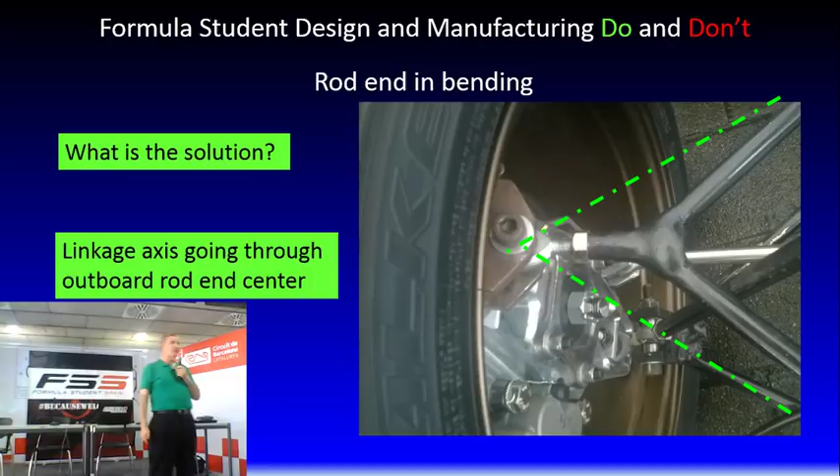So what's the solution? This is an example of a better car. Sorry, I think we went too quick. No, yeah, that would be the solution.

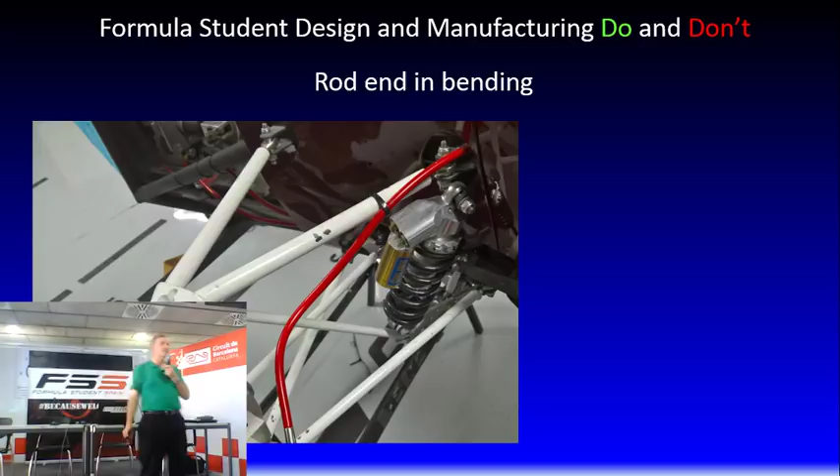Like this, this is another example. It's not as bad, but it's still bad. You have here the linkage of the pull rod, which is not going through the outboard spherical joint of the top wishbone. You see that? It's not bad, but I've seen obviously way worse than that. So you have to be very careful about that.

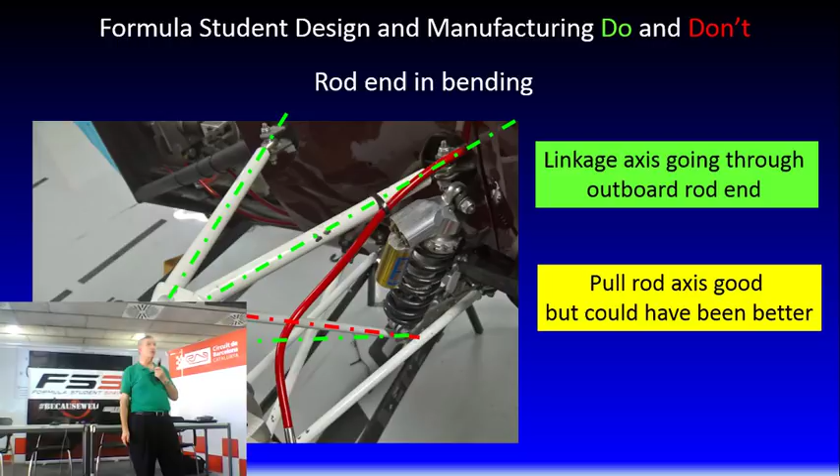Let me give you another example here. That would be a much better example.

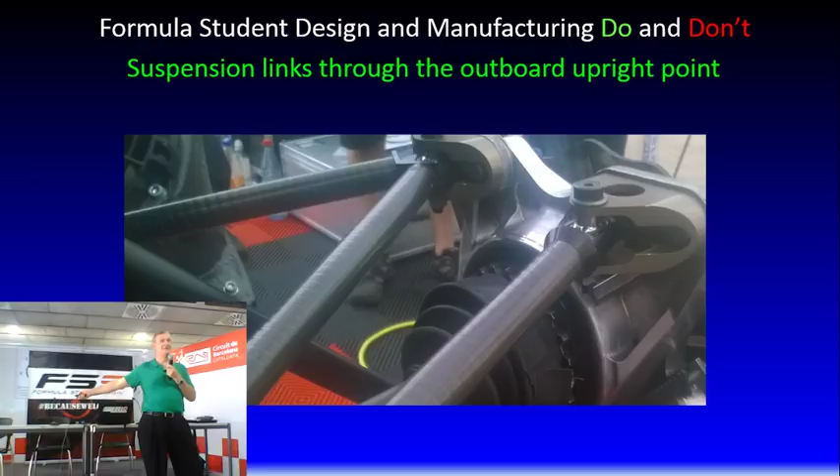You're up, and it's not because it's carbon fiber. I need to get used to this. Yeah, you are up now. Okay, it's going. Yeah, okay. So it's like a turbo lag on this thing, it takes a little bit of time to react. Presentation sometimes. It's like a lady, sometimes you touch the wrong button. Well, the girls are going to tell you the same thing about the guys, and they are probably right also.

You see, and it's not because that suspension is carbon fiber, yeah it's well executed and so on. It's probably expensive, but at least the linkage, the axis of the linkage of the top wishbone there, goes through the center of the rod end.

It's that simple. If you have a rocker, I'm going to do it with my hand. You have a rocker like this, and you have a push rod which is not in the plane of the rocker. You agree with me that not only are you going to have a rotation, but you're going to have a bending, correct? And usually the danger is that to cope with the bending, the guys build a rocker which is stiffer. And as we're going to see, stiffer means necessarily in that case heavier.

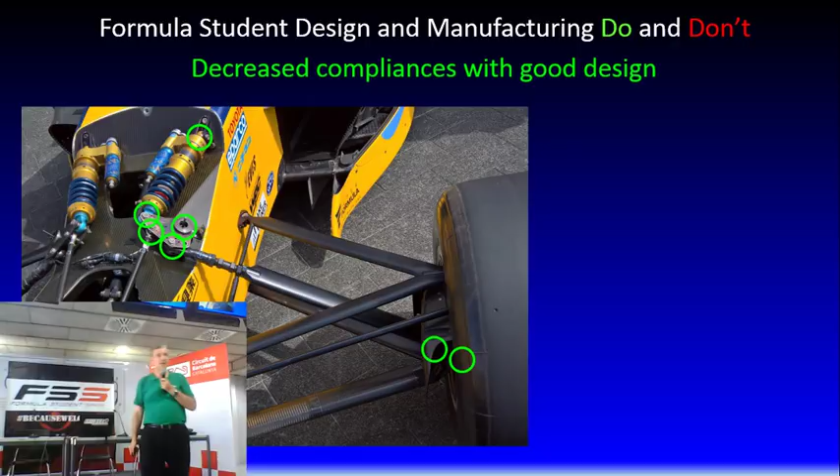What I'm trying to say is that when you have compliance, you can work on the consequence by making a part more rigid, which means thicker sheets of metal and so on, but the price you pay for that is weight. Or you can work on the cause and try to put the forces coming from the tire through the chassis at an angle which has less load, with the same grip on the tire, the same Fy, Fz, Mz, Fx on the tire, but less load on each pickup point of the chassis and in each suspension element. So we are doing that, you will reduce the compliance.

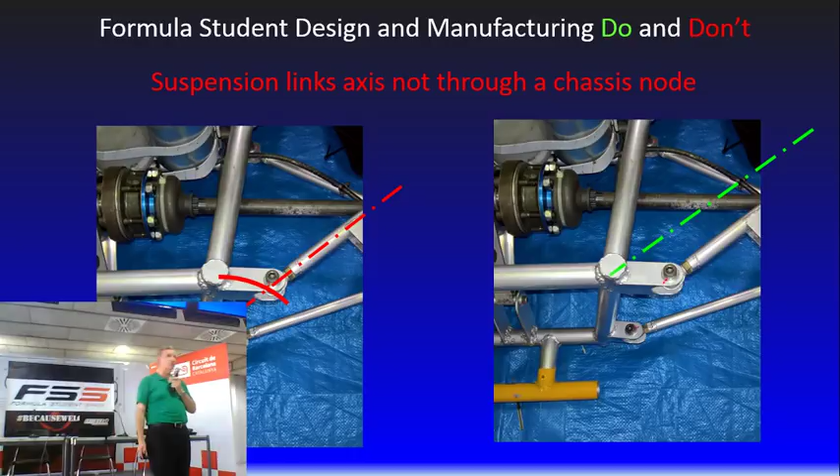Let me give you another example like this, which is also quite bad. If you look at this, the linkage in red is not going through the node of the chassis, and I don't understand why such a mistake has been done.

I need to make a comment here. I have a gentleman here who is a teacher in aerodynamics, and he will tell you the same thing for his business. Look, my company is selling software, so I believe in simulation. As much as this gentleman believes in CFD, I believe in vehicle dynamic simulation.

Yes, but there are some basic principles like this one which are, I don't know why, not taught anymore in engineering classes. You have to ask. A chief mechanic in racing one day said to me something I wish somebody would have told me 20 years earlier. He said, when you design a part, a wishbone, an upright, imagine that you are that part. You are a wishbone.

And you have to resist force. The force is coming this way. What is the angle with which you are going to resist that force? That's simple. Okay.

And I'm going to give you another practical example like that. So I wish that in green here, the linkage would have gone through the rod end center. By the way, I will make this presentation available in PDF for everybody, and you will be able to download it from Facebook. Okay, this one is simply criminal.

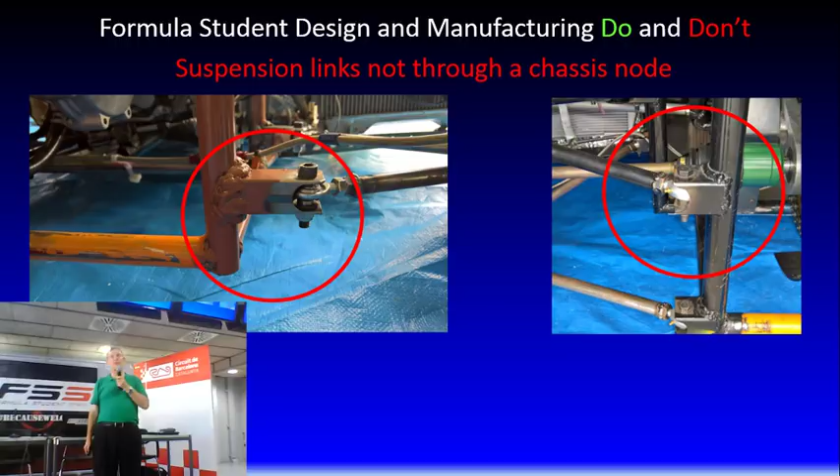The chassis should be one of them. The chassis is nothing else than the big bracket assembling everything—not only your suspension pickup points, but also attaching your pedal box, your seat belt anchorages, and all things like that. The chassis is one big bracket which is assembling everything. It should be one of the last things you should be designing. And then if you would have done that, you would have the pickup point arriving at the node of the chassis, because you would have put the node of the chassis where the pickup point of your kinematics was.

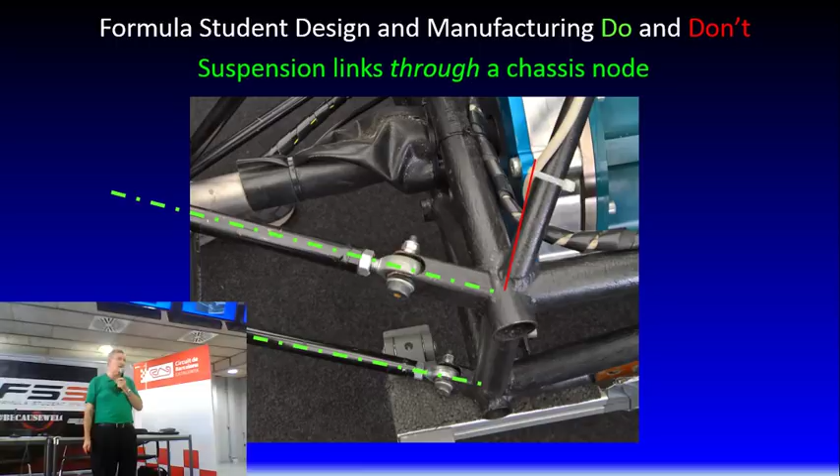So make a kinematic design, decide your camber variation that you want in rolling, heave, and so on, but make sure that the pickup point arrives at the node of the chassis. All right, that is not bad. At least the axis of the linkage of the suspension goes through the node of the chassis, but I'm not sure that distance was necessary. You see on the top there in red, that distance is going to make a possible flexion there. But okay, I will not be mad when I see that.

Okay, other unnecessary compliance. That's typical here. And I've seen that in this paddock very often.

Look, if I take this beam and it's supported here and there, do you agree that if I push on the middle, there is a chance I will be bending this beam? Yes or no? But if I push there, or if I push here, there will be less deflection. Yes or no? Why the hell is the push rod arriving in the middle of the wishbone?

And the guys have to tell me, but Claude, we calculated in FEA, and the deflection of the bottom wishbone is only 0.3 millimeter. Well, I have news for you. And before I continue the slide, I need to tell you a story.

I'm in Sebring with BMW Motorsport a few years ago. The mechanics are setting up the car, and I'm speaking with the chief engineer, and they were adjusting the rear toe. And I said to the technical director, how much do you need to change the rear toe for the driver to feel a difference? It's not a question of more understeer or less oversteer, it's not balanced for the driver to feel the difference.

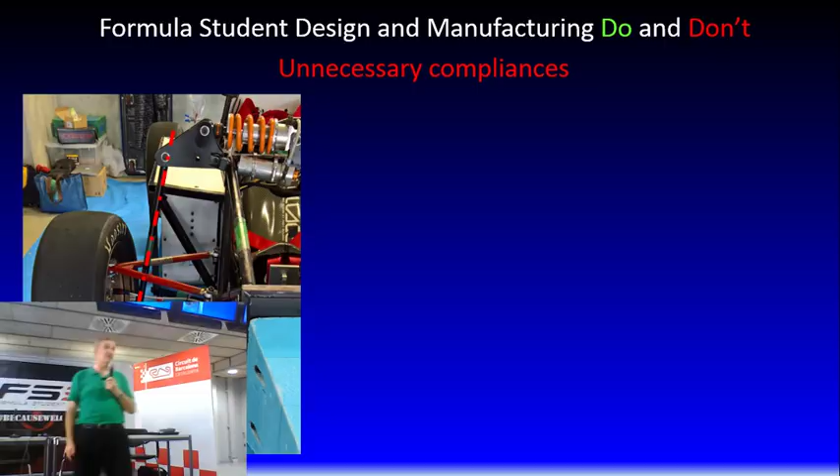So you realize, guys, that when your wishbone is bending like this, the calculation on motion ratio is not the one you think it is, correct? So what do you want? You want the push-rod axis going for the outboard point of the spherical outboard joint.

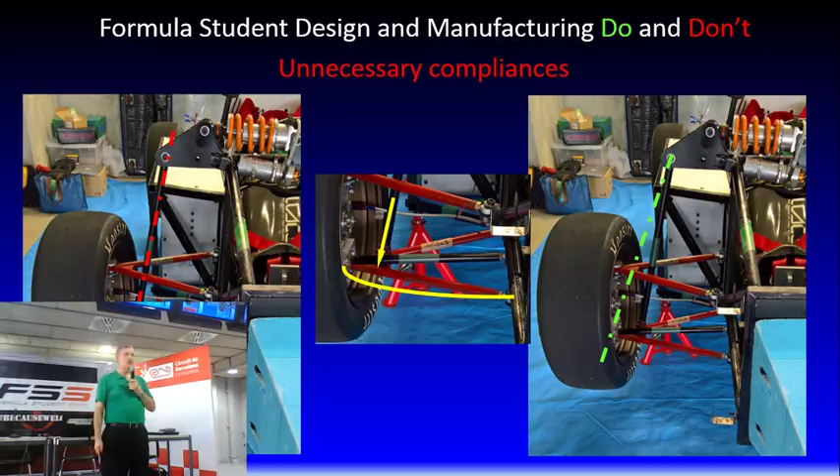Okay, I'm going to accelerate because there are a few of these mistakes I'm going to show you. This one is decent, not perfect, but close. You see the linkage of the push-rod going through the point of the outboard there. You have something similar this way. So that is decent - reduce the compliance and you will be able to reduce the weight.

Okay, all right, that is another crime. Single shear.

That's going to be bending. And guess what? It's on the toe ring. I guarantee that you're going to have tons of problems there.

What you want is double shear, like this one. This is good, though this is not a good upright in terms of the bearing, by the way, I don't like that. But this is single shear, you see that? You will admire this, it's a Formula Student car from about 12 years ago. You will admire the welding, pretty good, huh. Now, single shear.

Do you know what is the number one mistake that I see 95% of the time on a Formula Student car which has a rocker? All these rockers are single shear. I guarantee, the example I told you, put sandbags on the front or rear of the car with dummy wheels and dummy shocks and see how much your ride height is going down. 90% of the deflection is coming from the axles of the rocker, which are bending. By the way, if they are bending, you increase the friction in the rod end axis. So you really want to think about having a system which is double shear.

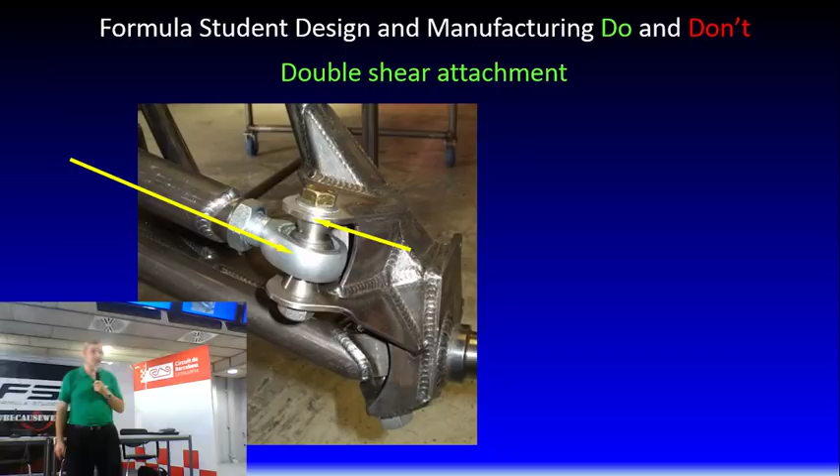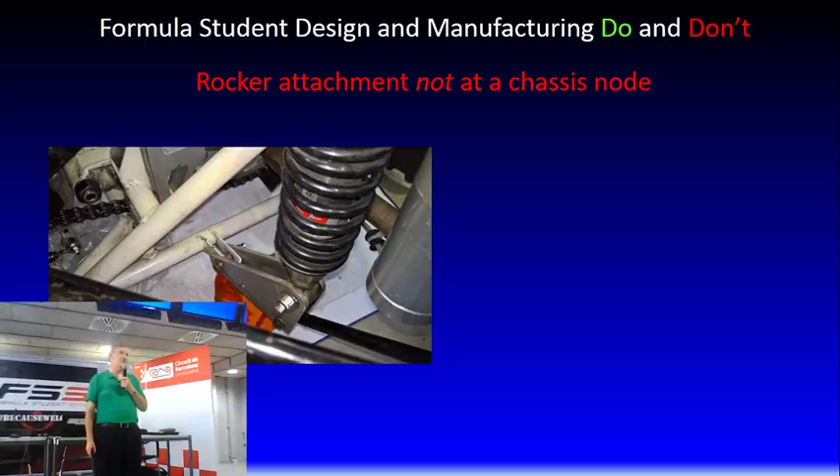Other things that I've seen. Yeah, that one is like this one. I'm starting to be really pissed. And that is okay, that has been done on an Indian car. Well, there are shitty cars here also.

You cannot have the pickup point, the rocker anchorage, in the middle of a tube. That tube is going to be flexing. You have a spring on a spring on a spring on a spring, and nobody's in control in that case. All right, no more comment. You cannot. The pickup point, the anchorage of a rocker, should be at a node of the chassis.

Okay, if you do a carbon tub chassis, then of course the recuperation of the forces should be there. Spring unit, same thing, this is another ridiculous thing. You have a damper spring unit which is on a bracket, a big bracket, and that bracket itself is in the middle of the tube.

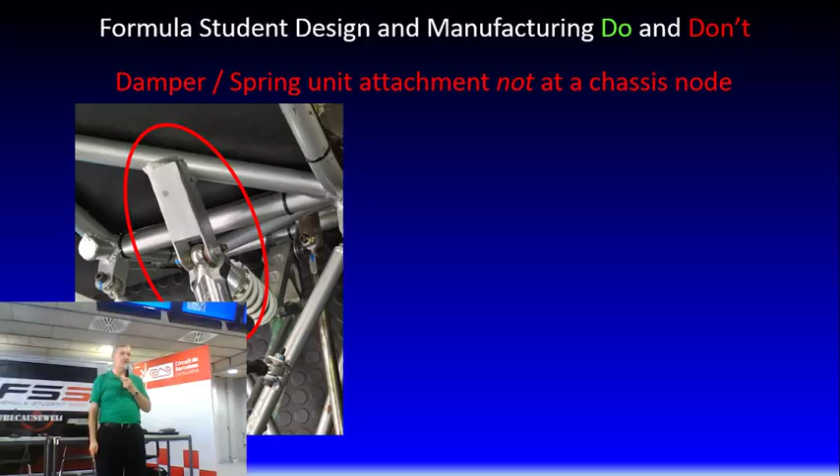I guarantee that the natural frequency, which depends on the motion ratio, is going to be wrong, because the motion ratio, with compliance or without, and don't forget you have to use the motion ratio squared. So when you make a 10% mistake on your motion ratio, that means you make a 21% mistake on your vertical stiffness on the chassis. So that's another thing here. That is also, sorry, I'm going too fast. This is something you want to avoid, a pickup point in the middle of the tube for the spring damper unit.

All right, the other thing is, this is a huge rocker. Are we in Formula Student or Formula Truck? Now, seriously, you would have reduced each size of that rocker by half. You would have had the same rocker ratio, correct? Guys, you need to think small.

You need to think lower CG. You need to think compact. You need to center the mass from front to rear, from left to right. You need to assemble the car towards the center of gravity, your inertia. There are three things which make a car very quick: low CG, lower mass, low inertia. Very clear. I don't have time to go through the calculation, but let me tell you this.

When you have 9 kilos of non-suspended mass, so upright with a light wheel and so on, that's already a very light non-suspended mass. These 9 kilos of non-suspended mass are 15 times more important in inertia than a 4-cylinder engine, because inertia is multiplied by the square of the radius of gyration. So you have to be careful with that.

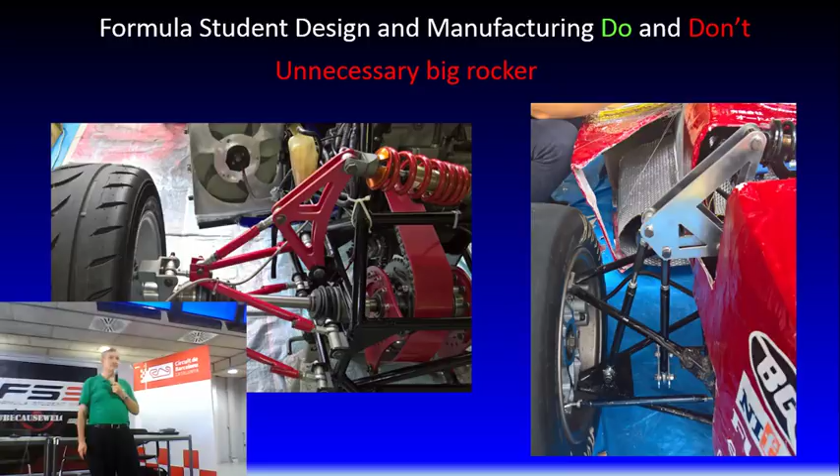That's another one, yeah, I went too quick for that. That's a huge rocker, it's absolutely not necessary. I'm going to accelerate. Yeah, these are rocker ratios, they have the same rocker ratio but they are much lighter. This is obviously something which is a little bit more sexy.

I mean, just, I don't know. I mean, yeah, you know, can I tell you a story here? You're going to look at me and say, why the hell does he use the word sexy in engineering? I'll tell you a funny story.

I built my upright, designed my upright for my Formula Ford car 40 years ago. Oh my boy, my guys, I was so proud, my upright was so beautiful. I went to see my machine construction teacher, and the guy looked at me and said, it's not sexy.

1979. Oh, by the way, the guy was a priest, a Jesuit. And he said, I don't understand why you use that word. He looked at me and said, have you seen the naked butt of a girl? I don't know where to put myself. I probably became red, because if I say no, I haven't seen anything about the word. If I say yes, I'm a big sinner. And he looked at me and said, I know you have seen one. I said yeah, okay. Isn't that beautiful? Yeah, okay, I want your pride to be like that.

I don't get it. He said, Claude, the best engineer in the world is God. Look at the FEA, the finite element analysis, of a neck. A neck has sustained 450 Newton vertical. Look at an FEA of a tree. It's perfect, it does exactly what it's supposed to do. And he said, everything which is pleasing to the eyes can be at the same time light and stiff. If you have a nice curve instead of a big angle, in FEA you're going to see less red color in that zone, correct? And you can make more stiffness with a thinner part using a large radius. That's where the word sexy is coming from, and in my opinion it's more sexy.

But, that's another one. An anti-roll bar, ladies and gentlemen, is supposed to work in twisting, not in bending. Do you see the huge distance between the leverage of the anti-roll bar and the support of the anti-roll bar, which itself is extremely frail? You agree that there is a problem there, correct? Huge distance there. Your anti-roll bar would be working in bending.

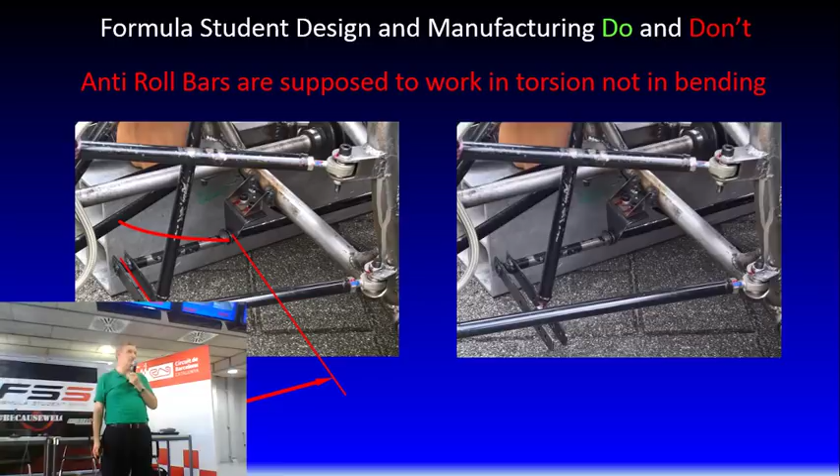Totally unacceptable. The other one here is a classical example. Not only on the bottom do you have a huge distance, as predicted, as we saw on the previous slide, between the support of the anti-roll bar on the chassis and the edge of the anti-roll bar. But also look at that, you have a single shear on the droop link of the rocker. Going back to see the droop link of the rocker there? Single shear. Remember I told you the droop link of the anti-roll bar should be in the plane of the rocker. And you say, oh, it's not so much. Mistakes will keep adding, and compliance is the enemy of driver control and confidence.

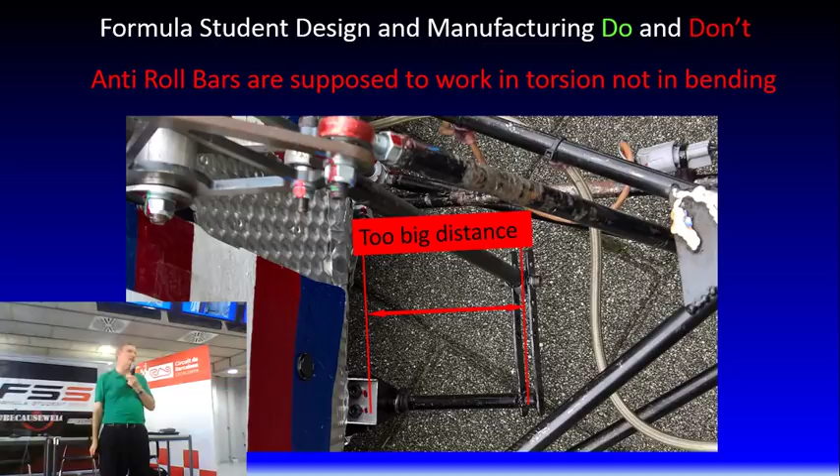A few other examples. Anti-roll bar compliance. Again, here in both cases you have single shear of the droop link. Try to avoid that. Very bad decision, very bad design. I saw many cars built like that. They said, oh yeah, but when we designed the car, we saw that the droop link was going to go through the push rod, so that's why we had to put a little offset there. You know what? That's because you start to build the car when the drawings were not finished.

I need to tell you a story here, 2011. I judged a team which was making their first car, University of Bologna. They won design, they finished second in the competition. There was only 17 cars in Formula Student that year, that was the first year. But they won design. And I went to speak to the team captain and I said, what's your secret? He said, we have a faculty advisor who is a pain in the ass.

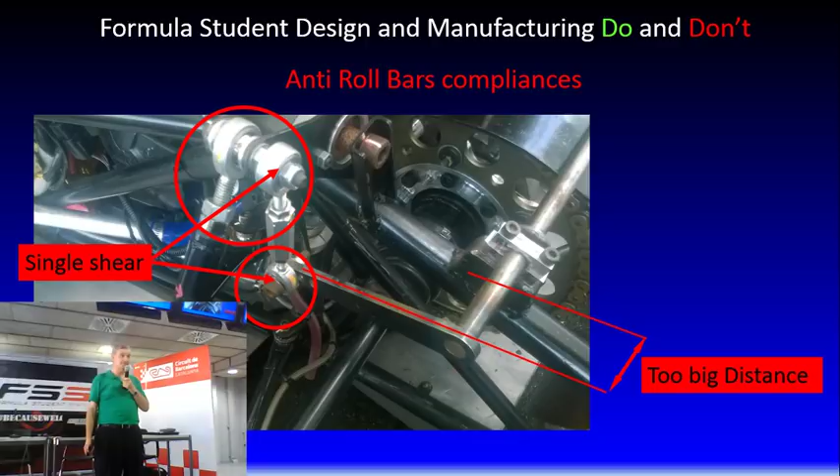Okay, all right. Another one. Big distance between the support. Another one: the pickup point of the bearing of the anti-roll bar should be at the node of the chassis. Otherwise, the stiffness of the anti-roll bar is not the one you're going to think it is. Okay, all right, I'm going to go here.

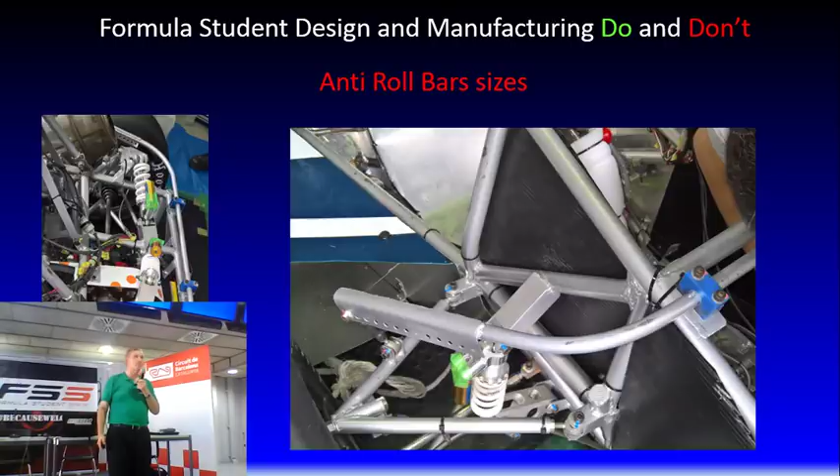Anti-roll bar is, yeah, this one is huge. And when I say huge, there are people who are making anti-roll bars, look at that, which are as big as this. I'm not kidding you. About 150 to 200 millimeters in length.

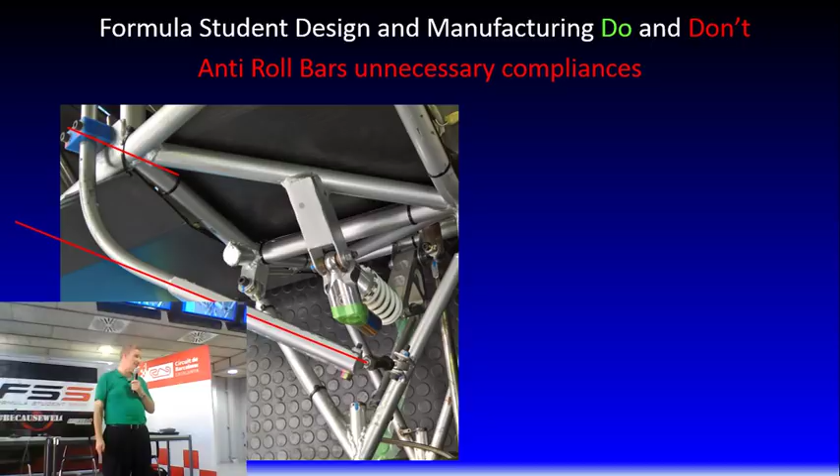And they have the same Newton per millimeter, Newton meter per degree at the wheel than this huge anti-roll bar. Think small, think compact, think minimum inertia in the YY, XX, and ZZ. Plus another crime, the pickup point of the drop link, which is happening in the middle of the wishbone there. It's going to bend the wishbone instead of bending the anti-roll bar totally.

Okay, you want another example of compliance? When I built my very first car, I ended up putting a dial gauge on the pickup point of the master cylinder on the chassis. When I was pushing on the brake pedal, the tube on which the master cylinder was attached was bending 2 millimeters. There was a part of my effort which was used to bend the tube instead of pushing the brake pad on the brake disc. Compliance. But then you have a lot of issue there of response.

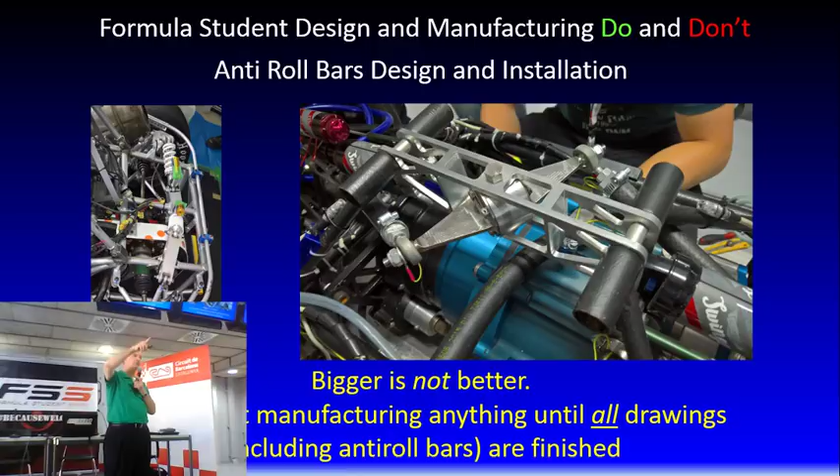We're on track, that's good. Anti-roll bar design installation, of course, huge thing. Oh, look at this one, for example. It's much smaller. You can probably have more Newton meter per degree with less compliance. That means better response and better control. The same number, if not more Newton meter per degree at the wheel with that small anti-roll bar. I don't say it's not because I showed that one better that that's what you have to do. There are even better anti-roll bars than this one. Think small, think compact, think light.

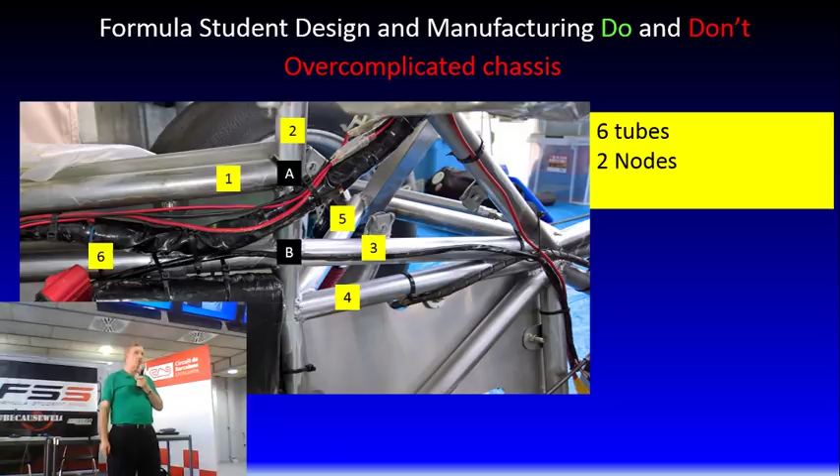So I'm going to tell you what's the secret if you want to make a tubular chassis. Minimum of nodes, minimum of tube, maximum triangulation, and a minimum of 3 tubes arriving at the node of the chassis. That's that simple. No, you have 2 nodes so close together and 6 tubes there. So the question is, try to make it minimum of nodes, minimum of tube, and maximum triangulation, and actually 3 tubes arrive at the same node at the minimum.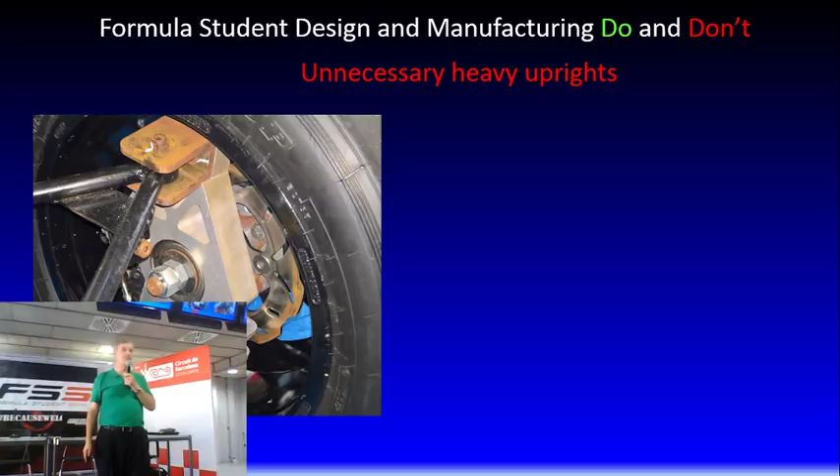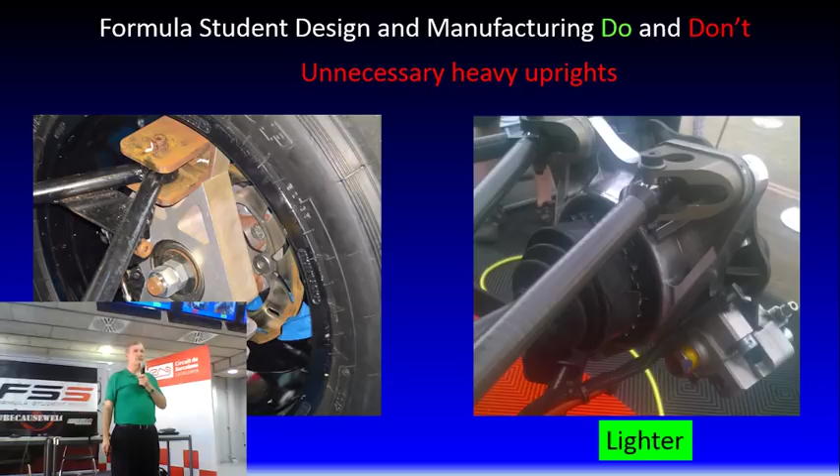That is, sorry, I'm too quick again. Let's see, it's a much better example. Okay, much lighter. Okay, let's go ahead. I took a tape meter on this thing. The push rod was 727 millimeters.

Do you agree with me that the longer it is, the more buckling you're going to have? So you're going to have compliance again. There is absolutely no need to do it.

Now I have a complaint. There is many suspension like that I see in the paddock with a push rod, a rocker on the top of the bodywork, and then the drop link going down and the anti-roll bar at the bottom, correct? When you make an omelette in the kitchen, it would not make sense to put the fridge with the eggs on the same floor as the bedroom, correct? You start to heat the oil, you need to rush upstairs to take the eggs, and then you come back and you crack your eggs in the fry, correct? Not very smart. Why in the hell do you take a force coming from the bottom of the wishbone of the tire, going up, then going back for the anti-roll bar there?

And guess what? On top of that, you have a drop link like this for the anti-roll bar and a push rod like this. All these things are going to be heavy and bendy. On top of that, I see these 2 rocker springs which are facing each other, and they're outside the bodywork. But the guys are making an aerodynamic car, and you realize that the springs which are on top of the cover there are destroying the efficiency of the rear wing. Well, if you make an aerodynamic car, make an aerodynamic car, alright? I don't say that you have to do push rod. By the way, a little comment.

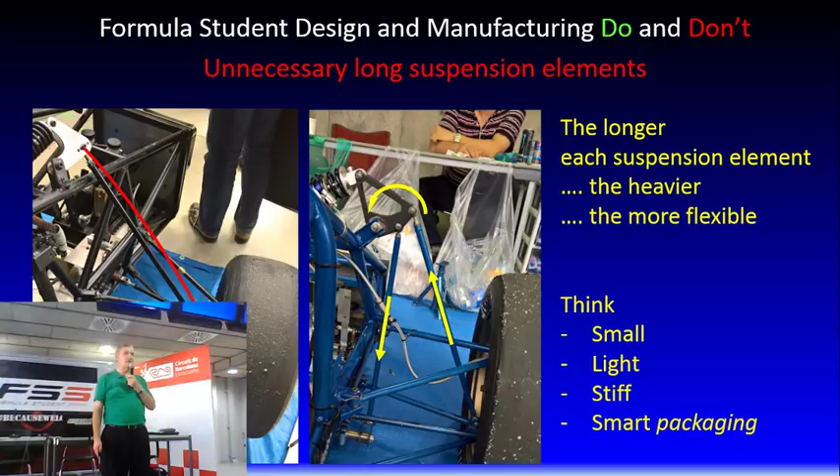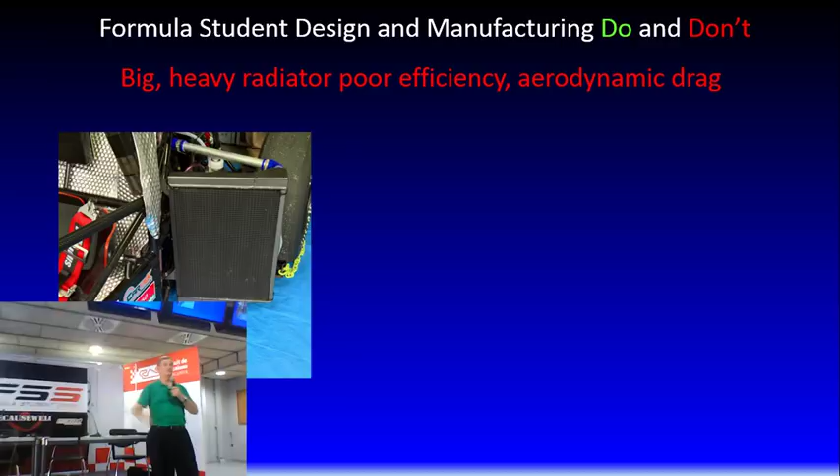All right, that's another one here, nothing to do with chassis, cooling. Look at the radiator. There is a team in Germany. They have 92 horsepower, and this is the size of their radiator. You agree with me that if you have a huge radiator like that, it's going to be heavy. And the reason why they need to have a big radiator is because there is no efficiency in this.

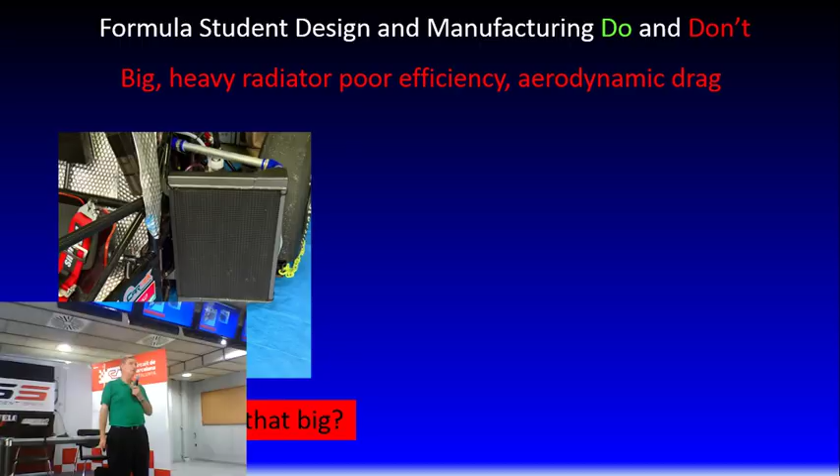Actually, that's interesting because I took a picture of another example here. You have the radiator there, and guess what? You have the air going in the side pod. And where do you think the air is going to go? The path of least resistance, correct? So when you have a radiator, oh no problem, we're going to make a bigger one. And you're going to pay for it with the weight.

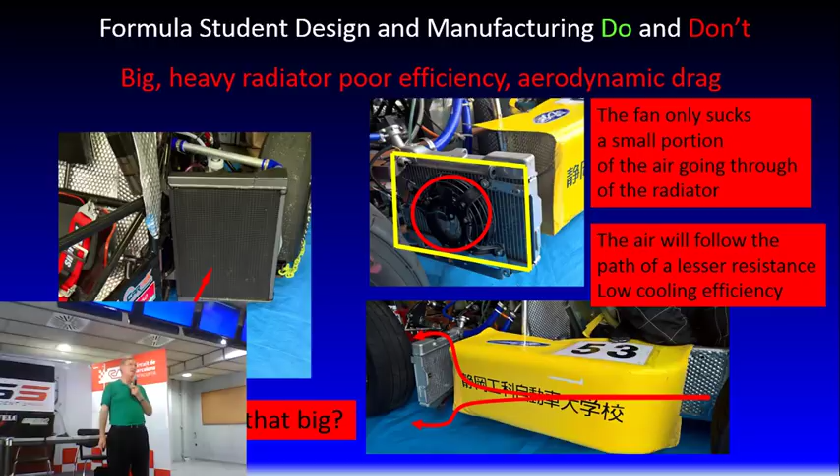Make sense? What about having, for example, here, that's a bigger one. And I took a picture not only of the radiator, but the side pod. There is not a nice venturi guiding the air through the radiator and exiting it. And by the way, a lot of kids are working on guiding the air to the radiator, and they don't care about extracting it. Extraction of the air of the radiator is at least as important as guiding the air in there.

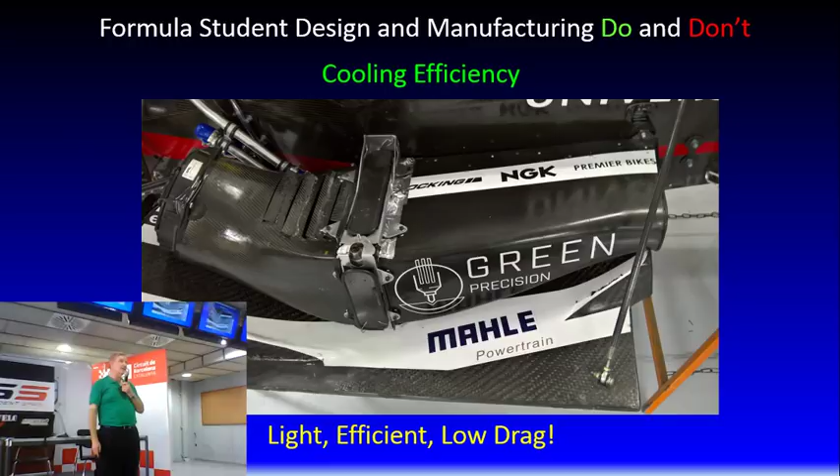Now let's give you a better example here. These people, from one year to another, they divided the weight of their radiator by 2.5 for exactly the same engine. Actually, they gained 3 or 4 horsepower from one year to another. But they divided by 2.5 the weight of their radiator, I think they said 2.6 kilos, and it cost them 350 grams to make this carbon fiber air conduction and air extraction with the fan at the end there. So think light, efficient, and so on. It's pretty clear. So conclusion: weight is your enemy. Compliance too. Avoid compliance. Make it simple, make it small, and make it light.

And form follows function. Darwin: you know, the fish wants to get out of the lake, and he's going to have legs. It's going to take 2 million years, but the form is adapting to the function, correct? Yes or no?

The worst thing that you can do for yourself when you design a car is to look at pictures of other cars on the internet. Define what function you want to achieve, and for that you need to make a brainstorm and a whiteboard. No cell phone, no internet. Define the function, and from there you will go through the form, not the other way around.

It could be that in your team you have a smart little guy who is like an Einstein guy who's going to have the light bulb solution. By looking at pictures of cars on the internet, your imagination goes from there to there. You are wiring up your brain with tons of solutions that are already existing. There is absolutely no need to copy another car.

Let me give you an example. You have Indian teams who are looking at German cars because the Germans cars are the best, so we need to copy the German car. Let me give you an example: I'm going to take two teams, Stuttgart and Munich. Usually they are decent teams. They have different cars. Why? Because cats are not making dogs and dogs are not making cats.

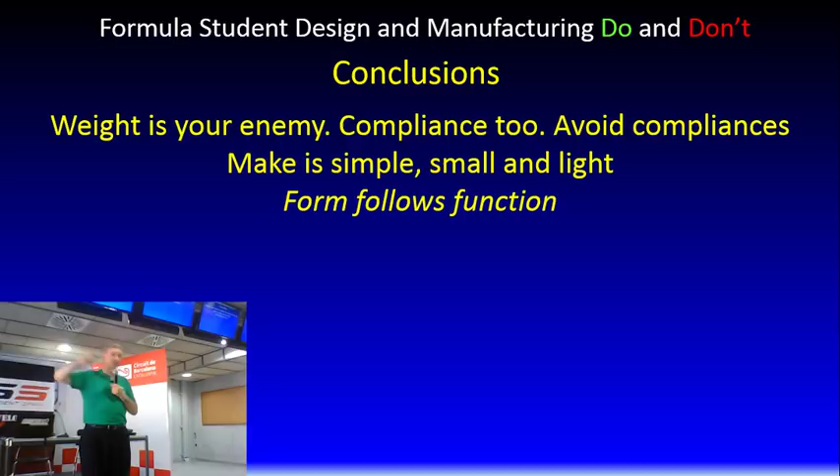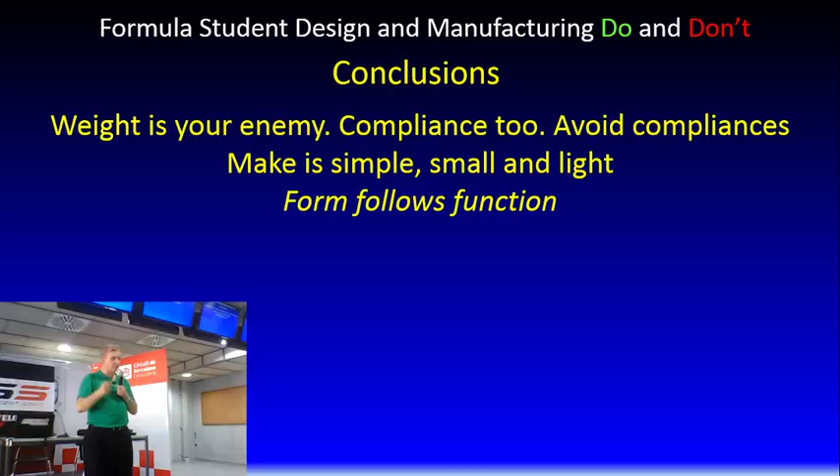So in that case, why would an Indian team with different—I don't say right or wrong—different budget, education, culture, access to software, manufacturing, and so on, want to copy a German car? It has to come from here, it has to come from the function. So write a list of the functions, then design the car, not the other way around.

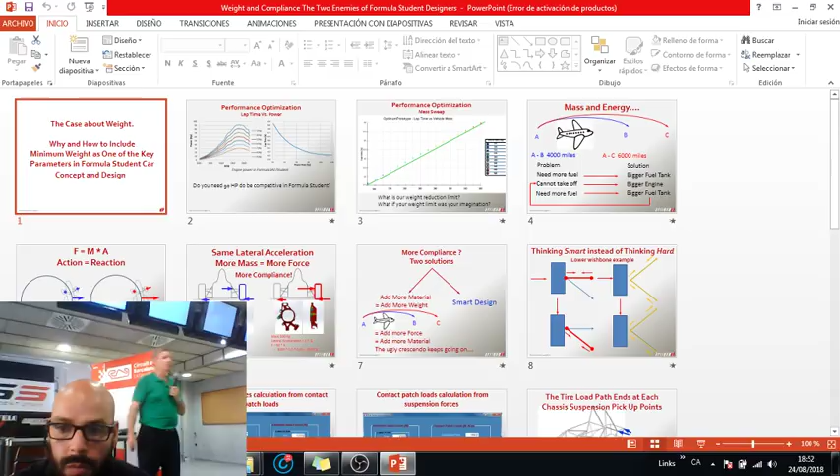So here you have lap time versus power. You have a power curve which you use in a single lap time simulation software. We put on the internet Optimum Lap, which is free of charge. It's not perfect, far from being perfect, but it's free. We did it to help students make a first selection based on the compromise between grip, downforce, drag, power, and weight.

The more power you have, the more your lap time goes down. But between 30 and 50 horsepower you gain big, and between 90 and 110 horsepower you don't gain much. Do you need 90 horsepower to win in Formula Student? You could, but you're going to pay the cost in fuel consumption.

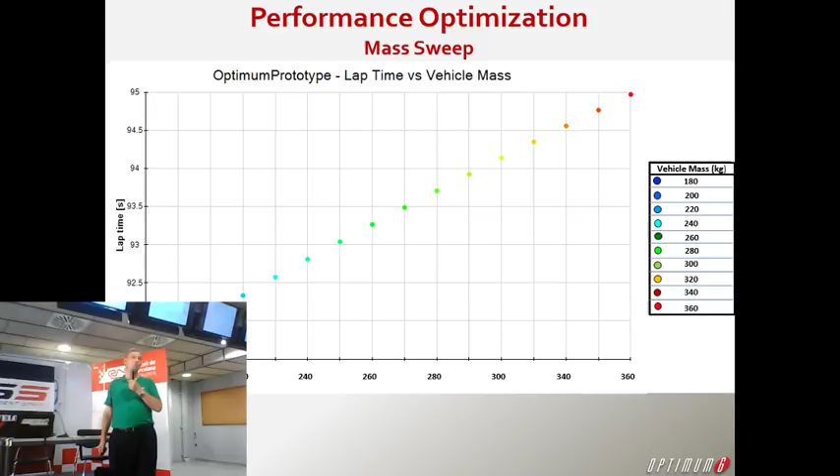F equals ma. If you have more mass, you need more power, but you pay more fuel. But if you plot mass versus lap time, it's incredible - it goes down.

I want to remind you that the coefficient of friction decreases with vertical load. So on a car of 300 kilo with driver, you could have a coefficient of friction of 1.4, and a 200 kilo car will have a coefficient of friction of 1.55. The lighter the car, the more return on investment, the more lateral force you're going to get.

So weight is an issue, and you maybe want to work on it. Let me tell you a story.

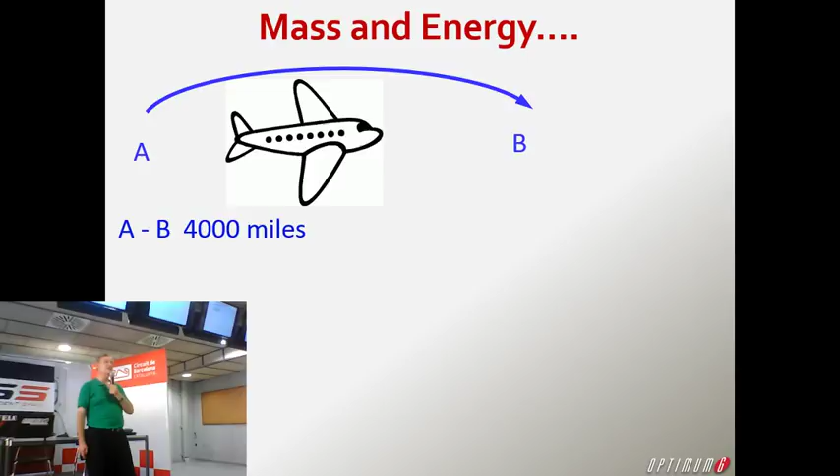You have an airplane flying 4,000 miles. You ask, are we in vehicle dynamics or flight sim? You'll see. You say to the pilot, I want you to do 6,000 miles, 50% more. You know what the pilot tells you? I can only do that if you give me more fuel, a bigger fuel tank, more kerosene.

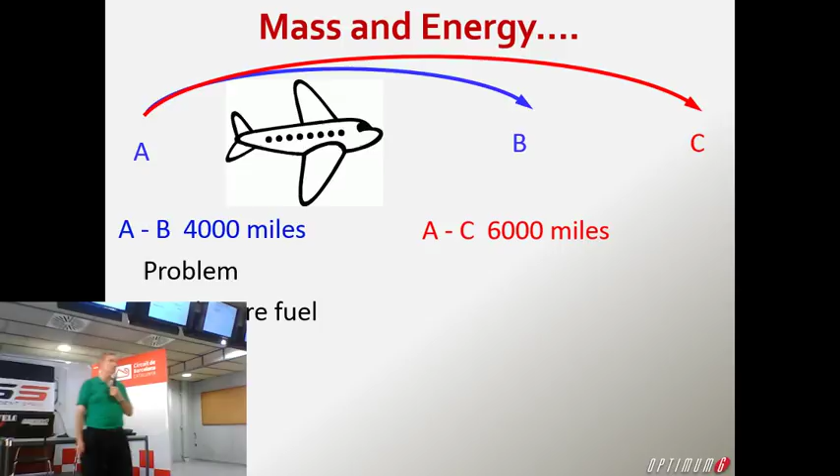So here's the bigger fuel tank. Then the pilot looks at you and says, the problem is the airplane is heavier and I cannot take off. So what do you want? I need a bigger engine. Here's the bigger engine. And the guy looks at you again and says, but a bigger engine sucks more fuel, so I need more fuel - and at a certain point the question becomes endless.

Now you look at me and say, what's that got to do with vehicle dynamics? Okay - Newton's second and third law.

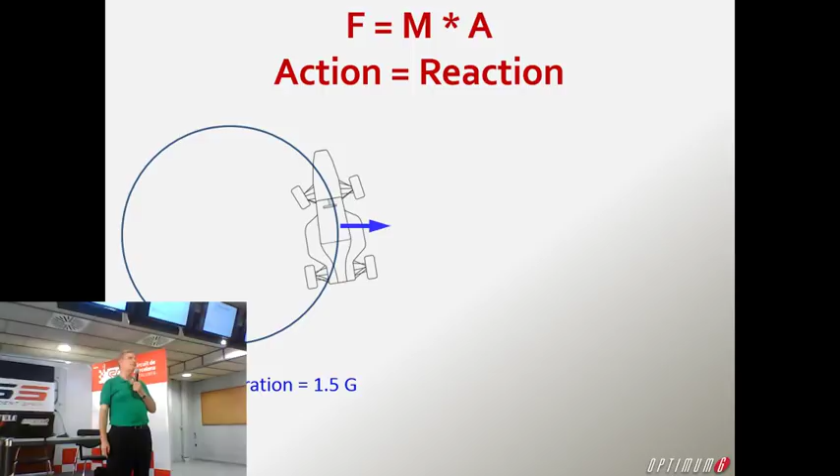We are going to look at a car on a skid pad. First example: F equals ma. The car is 200 kilo, and you take 1.5 G on a skid pad. You agree that you have a force of 3,000 Newton pushing the car towards the outside - 200 times 1.5 times 9.81, roughly 10, that's 3,000 Newton, correct?

Now you have a car which is 50% heavier - remember 50% more for the distance, 6,000 miles instead of - here 300 kilo, and still 1.5 G. So you agree, guys, that the lap time is the same. They are both cars doing 1.5 G. Yes or no? You agree with me?

All right, but you agree that now the sum of the force on all four tires will be 4,500 Newton. If F equals ma, with the same A and 50% more mass, you're going to have 50% more force.

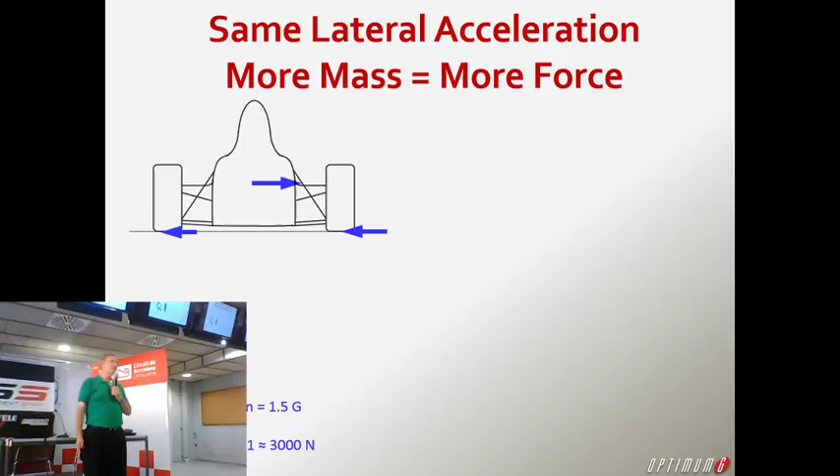So now let's look at the car viewed from the rear, and let's look only at the right rear corner - I'll zoom in on what's happening there, comparing the light car and the heavy car. Do you agree that I'm going to see more red color on the heavier car if I have the same upright? So do you agree that with the heavier car, with the same upright, I'm going to have more risk of failure, or if there's no risk of failure, more compliance?

Yes or no? Okay, a word about compliance. Between the steering wheel and the two front contact patches, I counted them—you have 24 springs. Worse than that, you have 24 dampers, and these dampers are in hysteresis. So you turn the steering wheel, and it's going to take a lot of time for the tire to start to twist and take a slip angle and generate lateral force.

Imagine a jet fighter. The guy has the stick between his legs, and he moves it like this. But because there is so much flexion everywhere, the aileron on the back takes a lot of time to respond. Do you think that guy is going to win a fight against another jet? Okay, you turn the steering wheel and it takes a long time for the slip angle to build. Do you think the driver has confidence?

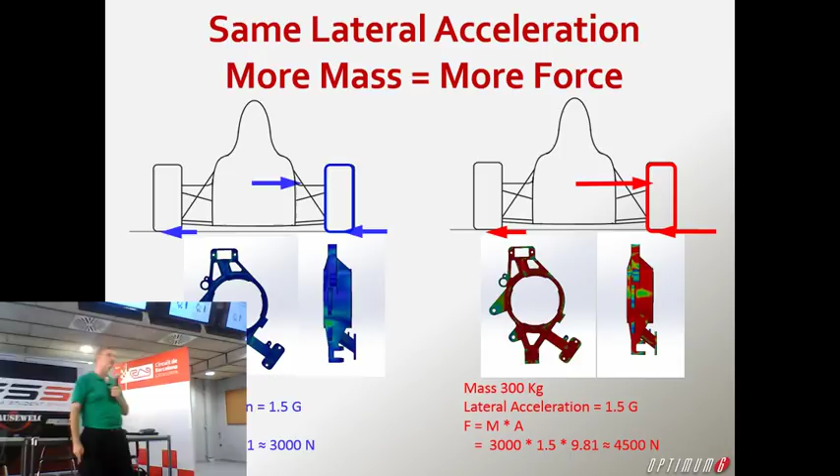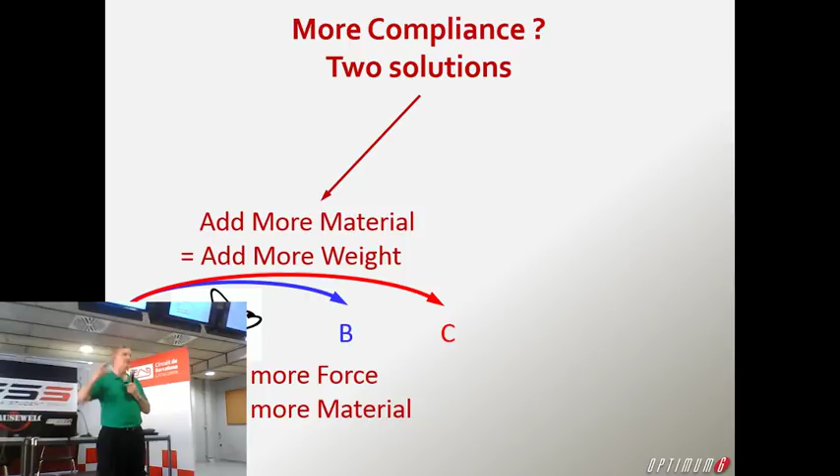So you have two solutions. Either you add more weight to go back to the same compliance, but then we go back to the crescendo of the disaster—more weight equals more deformation, and more weight equals needing more force, and so on and so on. Or you're smart, and you take into account—instead of working hard, I will ask you to work smart.

Let me give you a very simple example here. You're going to have a force on a tire, viewed from the top. You agree with me that you have some force on the tire. You're only going to have the top linkage resisting the lateral force. Yes or no? Yes? Okay.

Now, if you have braking, you agree that most of the force in braking will go in the rear link of the bottom wishbone leg. Yes or no? Okay. Now, if you have a wishbone designed like this, let's say 45 degrees, do you agree that the force you have in the wishbone is going to be—what? Zero, about 70% of the previous one? Why 70%? Because cosine of 45 degrees is 0.7, correct?

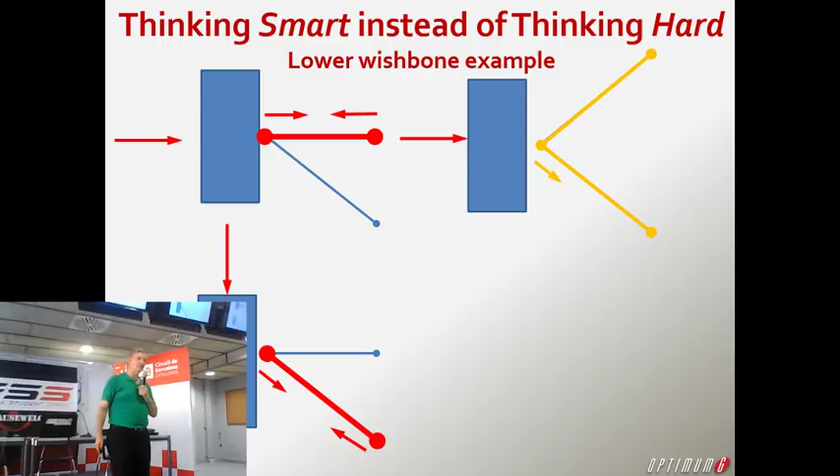So do you agree that for the same force at the chassis, you're going to have less load on the wishbone, correct? Then your rod end can be 6 instead of 8 millimeter, yes or no? Then your tube can be lighter. Then the chassis guy will be very interested to know that the XYZ force at the pickup on the chassis will be less, yes or no? So you don't need, for the same amount of Newton meter per degree of your chassis—you agree that with less force at the pickup point, you can have less weight in your chassis.

Think smart, okay? Now let me give you an example here. This is a question that I ask sometimes, and here the same thing: you're going to have one link in compression, another one. Look, I'm going to take this object. I'm going to throw it in the air.

You agree that this object has 6 degrees of freedom—forward, backward, left, right, and then free rotation, correct? That's the reason—because you don't want the wheel to go more quickly to the left or to the front of the car. That's why you have 6 degrees of freedom which are locked: 2 linkages for the top wishbone, 2 linkages for the bottom wishbone, 1 toe link and 1 push rod. You are at 6, correct? Okay, you want some degree of freedom control for steering and some for letting the wheel go up and down. That's why you have the spring in tandem.

Fine. So 6 multiplied by 4, because you have 4 tires, you agree that you have 24 wishbone linkages in the suspension. I'm going to ask during design final, if I see you next year—you take design final, you take a corner to the left, you have 1.5 G. Can you tell me which one of the 24 linkages has the highest load? And if you cannot give me an answer right there, you are dead meat with me.

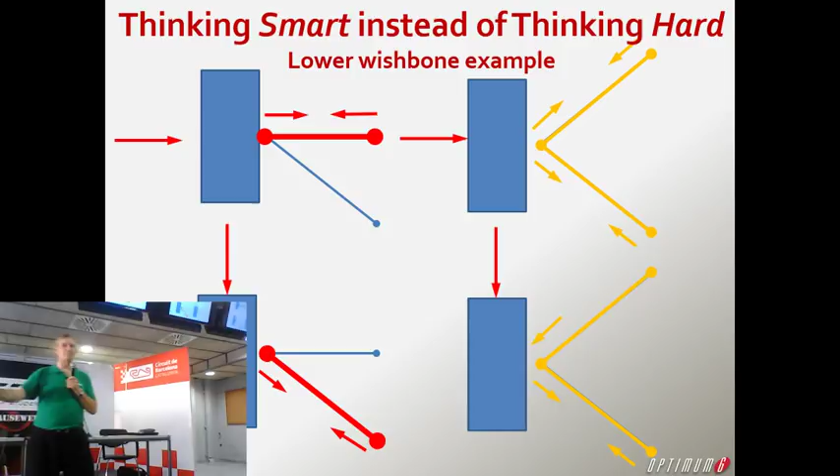All right, you can make this calculation. There are teams that are not bullshitting me, because not only is the software open, but they have binders printed with all the load cases. These people have done their homework, and they know the size of the tube, the rod end they need, and the force that applies at the chassis, because they've calculated the load case.

Yes or no? But I want to insist, there are two ways to look at that. One is: this is the force when braking, accelerating, or accelerating and cornering, and so much downforce - this is the force on the tire, force at that moment, that's the force in my imposed kinematics. Then you decide your tube and chassis dimension with that. There's another way to look at it: I know the force, now I change the shape of my wishbone to diminish the force, as I showed you here. Make sense? That's what we call going back to the sexy stuff. You're going to be able to do something which is both light and stiff.

What you need to do is something like that: you impose your XYZ pickup points in a simple software like this, you impose the forces that you have at each point. It doesn't need to be perfect to be useful, guys. You have the TTC, you have your tire models, you roughly know the FX, the FY, the FZ when you brake, accelerate, when you corner, or a combination of that. And then you can recalculate the force that you have in each element of the chassis, and the guy who designed the chassis would be very happy to see that.

All right, now another one here. Yeah, that's what I'm saying - the guy who designed the chassis would be so happy to have the force at each node of the chassis. So everybody's going to be a winner when you do the suspension load.

Stop here, I need to tell you a story. There's a very good judge, Steve help me, in England - he was there this year. He's building race cars for hill climb. I forgot his name, he's a manufacturer of parts for Williams and Red Bull and so on - David Gould, G-O-U-L-D. He has a website.

He judged a team and said, show me your load case. The people showed everything, and he said, okay, if you're that smart, let me give you a load case here: the car goes backward because you are spinning the car, now you jump on the brake pedal - what is the load case? He didn't have it. You know why he asked that? Because he had a customer for whom he manufactured a hill climb car. The car went backward, the driver jumped on the brake pedal because he didn't want to smash the rear wing on the wall. You know what? The two lower wishbones broke.

1986, long time ago, like an old puppy now - Indianapolis 500, March, turn 1. I saw the video: at the entry of turn 1, the rear wing is saying ciao baby. And if you want a show, tie the seatbelt because you're going to have one. And sure enough, the car pulverized, $500,000 down, and the driver woke up in the helicopter. Thank God he was fine.

They remanufactured the bracket - the bracket of the rear wing on the gearbox was what broke, you could see it on the video. They remanufactured the rear wing. Make sense? Two days later, turn 1, Indianapolis, the rear wing says ciao baby again, and the second car is pulverized. Do you know why? Because the engineers calculated the bracket of the wing versus the downforce and drag on the wing, but they never calculated the force when the mechanics were pushing the car forward - which is a ridiculous force compared to the drag and downforce of the wing.

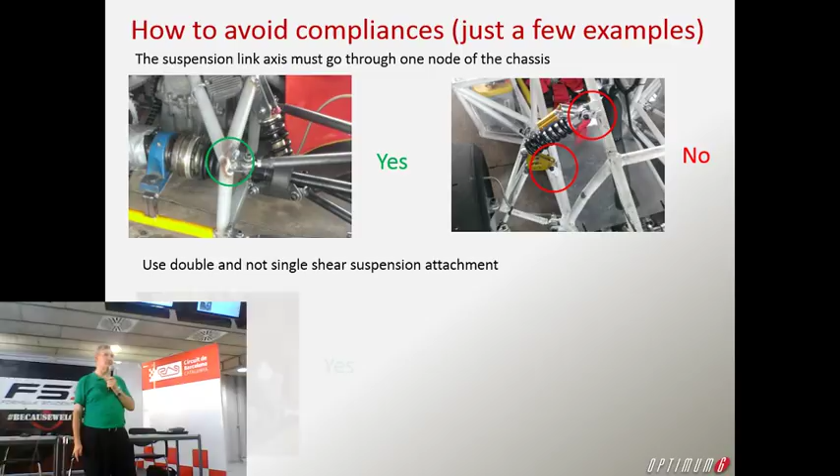So I invite you to make your compliance, your load there. That's an example, I'm going to go quickly. You cannot have the pickup point of a rocker in the middle of a tube - that is forbidden. Double shear instead of single shear.

Let me tell you about Formula Student Electric 2011. I was judging a Dutch team and a German team. The Dutch team was 82 kilowatt, four-wheel drive, tubular chassis, and no wing. The German team was also 82 kilowatt, four-wheel drive, no wings, but 230 kilo.

Now if you compare a monocylinder, carbon tub, 10-inch, no wing, with a tubular chassis, wing, 4-cylinder, 13-inch, yes, those things are not comparable. But here they are comparable, yes or no?

So I went to see the German team and said, guys, can you explain to me why for the same bloody concept you have more than 50% of the weight? They looked at me and said, but Claude, we saved 35 kilo compared to last year. I said, you don't answer my question.

My question is not how much did you save compared to last year - my question is why, despite you saving 35 kilo, are you still more than 50% heavier for the same bloody concept? And we engaged in a conversation.

At a certain point the German team said to me, but Claude, if we put the battery of the Dutch team in our car, we don't finish the endurance. Why don't you finish the endurance? Because our car is heavier. And so the cause is now becoming the consequence.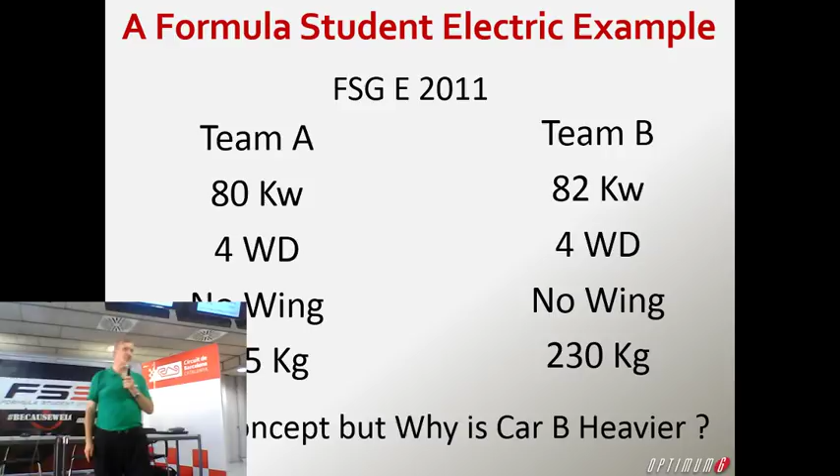Look at the suspension. On the German car at 230 kilo, every single rod end was 8 millimeter, all of them. On the Dutch car, on the bottom wishbone you had outboard 6 and inboard 5, on the top wishbone outboard 5 and 4, and the toe link was 3 millimeter - looked like a little sewing machine part.

Why? Because for the same lateral acceleration, if they have less mass, they have less force. For the same acceptable risk of failure or level of compliance, they don't need a big rod end, they don't need a bigger tube. Does that make sense?

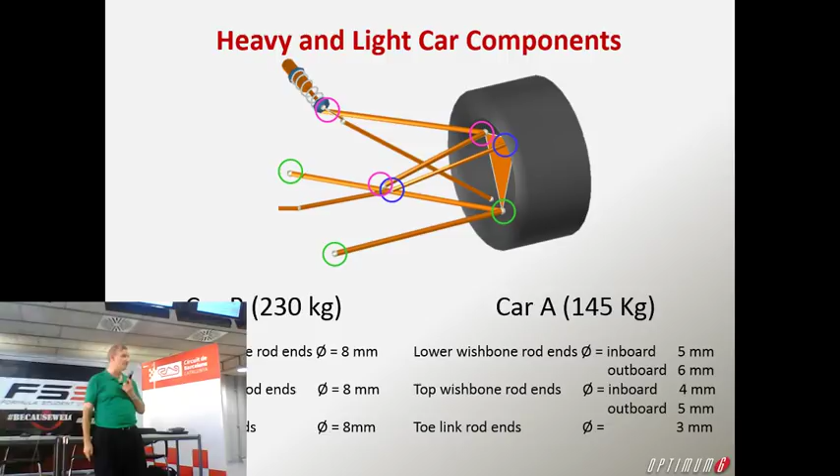So I'm going to tell you this: the lighter the car is, the lighter the car can be. The heavier the car is, the heavier the car can be. Let me tell you, and we're going to finish soon.

Let me tell you the number one thing I will do with your car - some of you have seen me judging. I will go on my knees, grab the front tire on the inside and the rear tire on the outside, or vice versa.

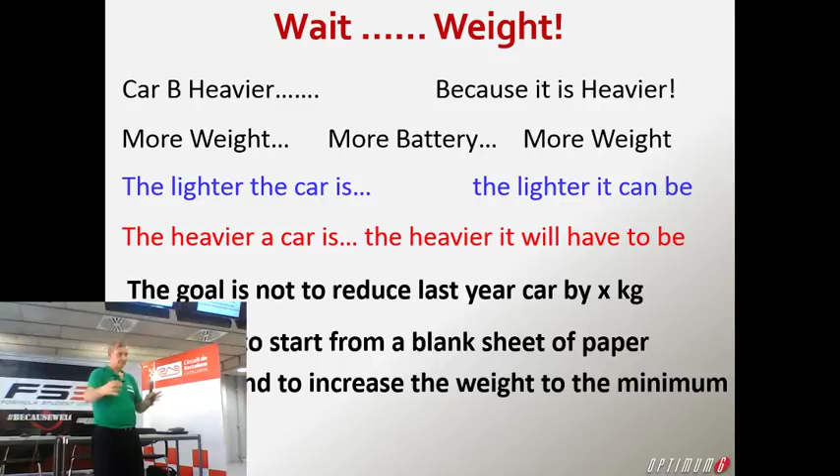And I will create an MZ, a self-aligning torque. If I can feel or see some toe change, you're not going to go to the final with me.

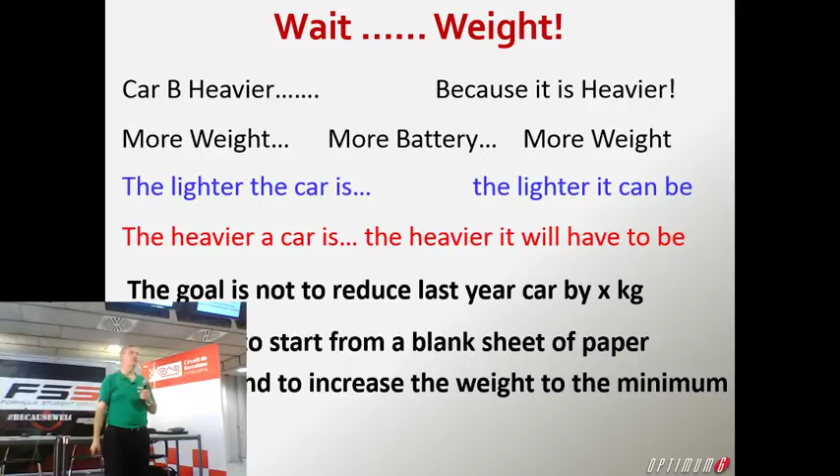Let me tell you the number one mistake that people are making. I'm going to do a little experiment - can you come here please? Okay, thank you, it's going to be painful but just for a few seconds. Don't worry, it's really simple.

Here you have a door - this is the hinge, and this is the door, yes or no? I want to enter your office, but I'm really mad at you, so you don't want me to enter. So I'm pushing - what do you do to prevent me?

Good, look what he did. He pushed where? Do you agree he pushed at the extreme, not in the middle? Do you agree that if you push in the middle to resist my force, he'd need half the force, correct?

So guess what, the door is going to bend. He's not going to push on the hinge, yes or no? That's pretty simple, correct? And did you see that he pushed with a force perpendicular to the door, not at an angle? Yes or no?

Thank you. Well, in that case, why in the hell do you have such a small dimension between the bottom wishbone and the pickup point of your toe link?

For the same MZ, if you double that linkage, the toe base, which is the distance between the pickup point of your top or bottom wishbone and the pickup point of your toe link, if you double it, you agree you have half the force, yes or no? And if you have less force, you don't need as big a rod end. Does that make sense? We are back to the same thing.

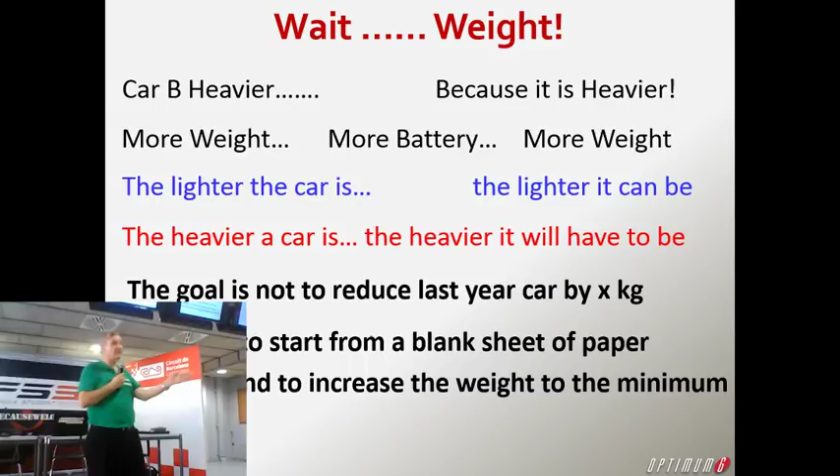Think function before you think compliance. And the worst thing is when I see toe links - whether rear or front - they should be nearly perpendicular to the inline axis of the car.

Okay, now let me go crazy: how stiff does the chassis torsion need to be if your mass is 0 kilo?

I'm exaggerating a bit, but do you agree with me that the lighter the car is, for the same Newton meter per degree, the less material is going to be needed, and the better it's going to be for acceleration, fatigue on the tires, on the brakes, and so on. The heavier the car is, the heavier everything will have to be. The lighter the car is, the lighter it's going to be.

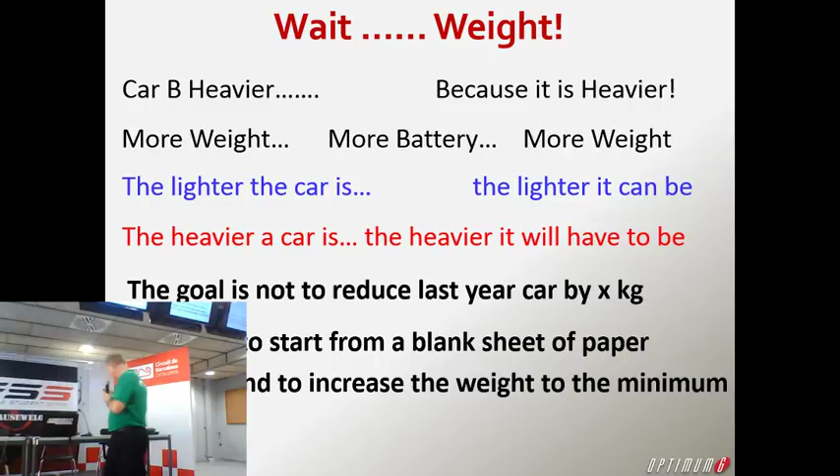Now, there's another one. Here, we have a few slides from the end. Form follows function - that's what you need to do there. And it's not only about Formula Student.

You see that Golf from 1976 and that Golf 7 from 2013 - 810 kilos then, and now 1520 kilos. A lot of that mass is because of safety, and the cost of safety is acceptable, of course, it shouldn't be a barrier. But of course you also want the leather seat and the 7-speaker system and so on. So what are the consequences in terms of fuel consumption? All the work done by the engine engineer and the aerodynamicist has been killed by the mass.

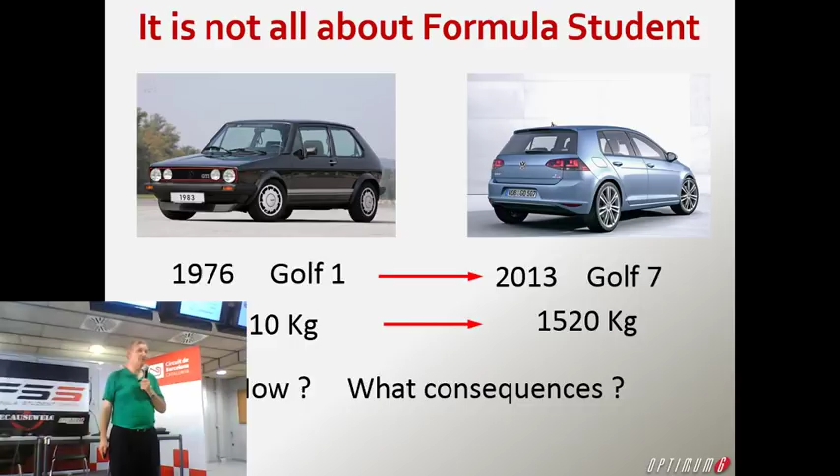Things are changing. The new Audi A6 in full aluminum will be 15% lighter than the previous car. An Audi A3 is 85 kilo lighter. And you know what, it's not only about the automotive industry.

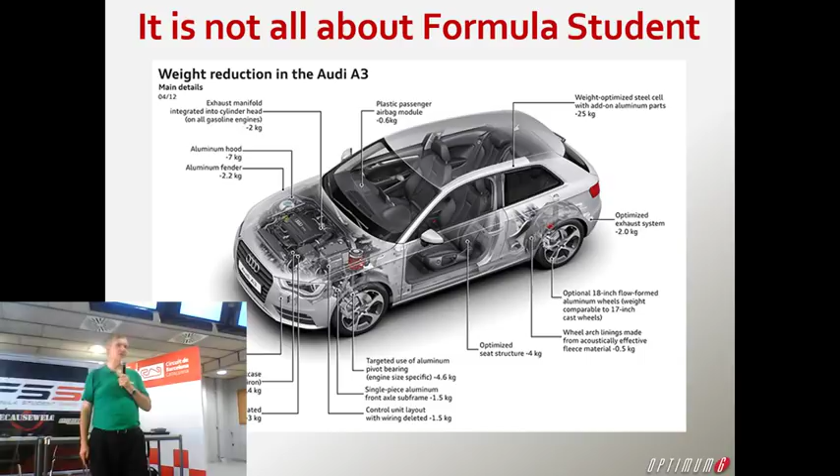If you go to the airplane industry, Airbus especially - I have a friend of mine, an ex-Formula Student guy, designing a system which looks exactly like a towing system on the front, with two rod ends. He has divided the weight of this thing by 8. The lighter the plane is, the less kerosene you need to fly a certain distance, especially during takeoff. So it's all about that.

So I encourage you to think light. Let me explain - which upright do you prefer here?

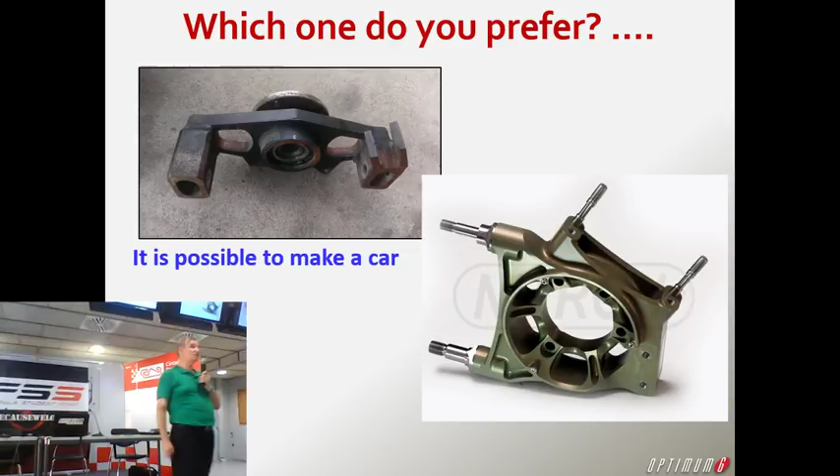I think I know the answer, correct? By the way, I put that upright - it's from a real car, didn't pass tech - on the scale, and it was 6.7 kilos. This is not Formula Truck, it's Formula Tank. So it is possible to make a car which is simple, light, stiff, aesthetic - you remember, it has to be somewhat sexy - and cheap to manufacture and easy to maintain.

So voila guys, that's basically my two presentations. Summary:

Form follows function - define the function before you define the form. To define the form, take a white sheet of paper, no pictures of cars, and describe what is a good team and what is a good car. There's a video explaining this whole process on Google - if you type my name you'll find it. It's a 28-minute video, don't care about the first 3 minutes, that's bullshit marketing about my company, but the next 25 minutes are useful. So, function, then form, not the other way around.

Think light, think compact, and for God's sake avoid compliance. Please remember this: compliance is the enemy of the driver's confidence and control. And the only way you're going to decide what is too much and not enough compliance is by making a transient simulation.

One of these days you're going to have to make a step test, simulation and test. By the way, a lot of teams here miss correlation. In Germany last year, I had a Canadian team who showed me a 7-post rig simulation which had me on my knees - I was absolutely amazed. The guy took me on an intellectual and emotional roller coaster, this thing was really impressive.